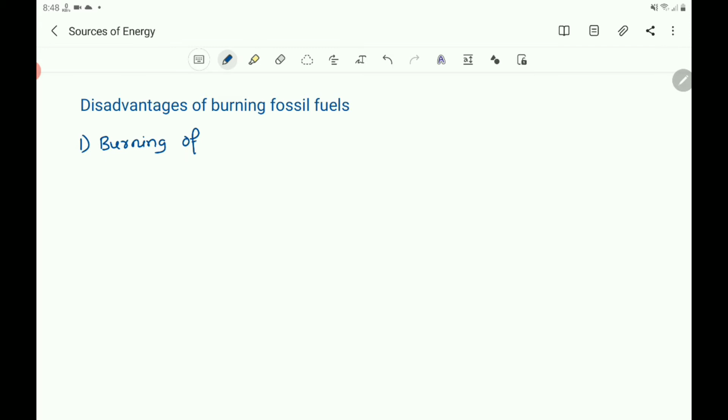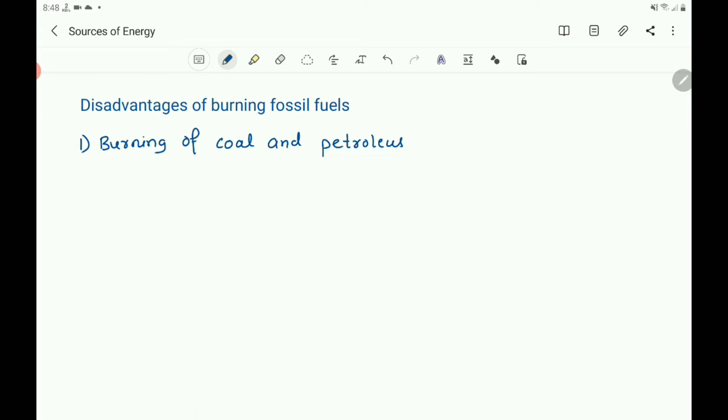Burning of coal and petroleum leads to air pollution.

Burning of fossil fuels causes acid rain by forming acidic oxides of carbon, nitrogen and sulfur.

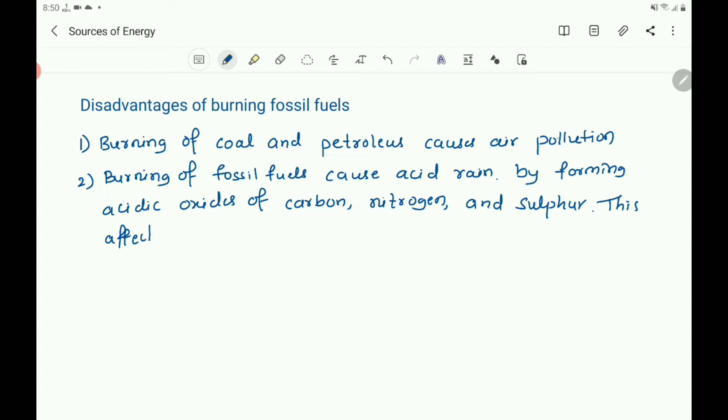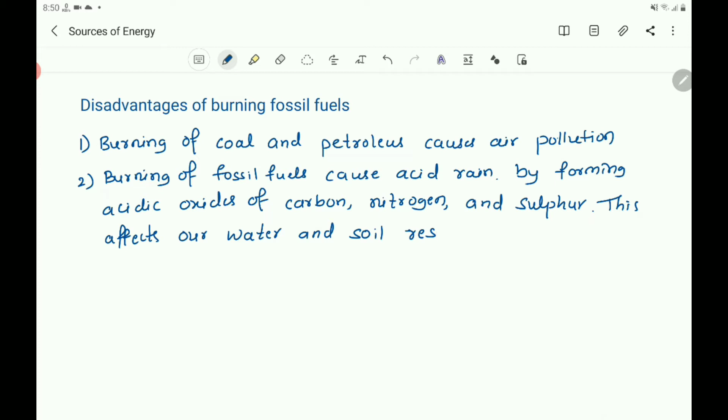This affects our water and soil resources.

Burning of fossil fuels causes greenhouse effect also, and this greenhouse effect causes global warming. It increases the global temperature.

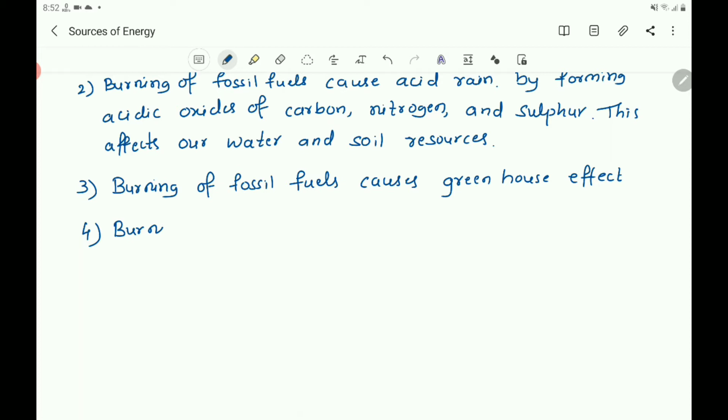And also, burning of fossil fuels causes smog, which causes breathing problems and other hazards.

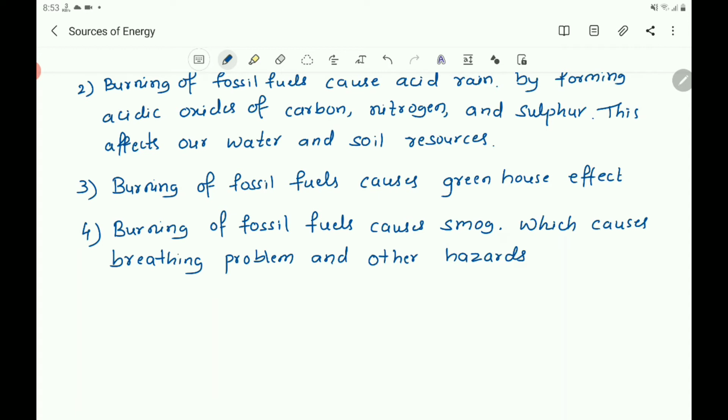These are some of the disadvantages of burning fossil fuels.

Wood should be replaced by alternate sources of energy. Why? The use of wood as a fuel is not advised, although forests can be replenished. Continuous use of wood causes deforestation. Yes, we can replenish the forest, but it is advised to minimize the use of wood, because it takes more than 15 years for a tree to mature. Cutting off wood would also cause environmental imbalance.

Further, burning of wood causes a lot of pollution. For these reasons, it is not advised to use wood as a fuel. So, wood should be replaced by alternate sources of energy.

It takes more than 15 years for a tree to mature.

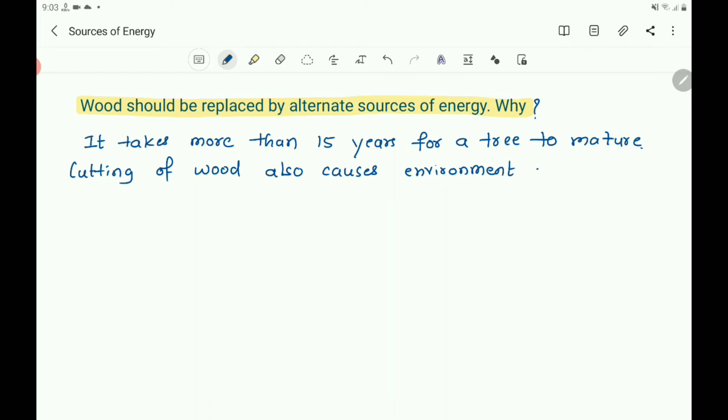Cutting of wood also causes environmental imbalance.

Further, burning of wood causes a lot of pollution. For these reasons, it is not advised to use wood as a fuel.

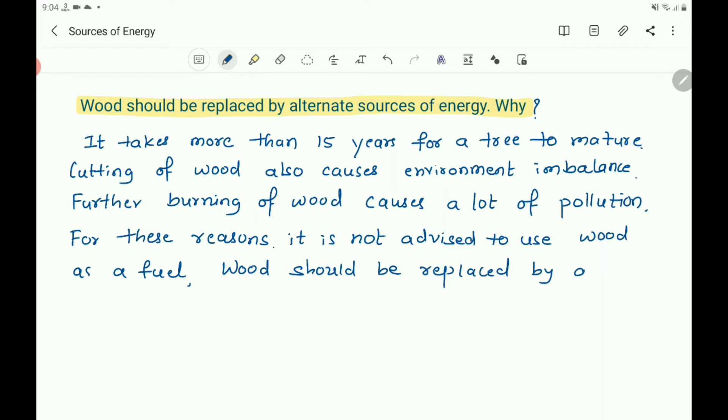Wood as a fuel should be replaced by alternate sources of energy.

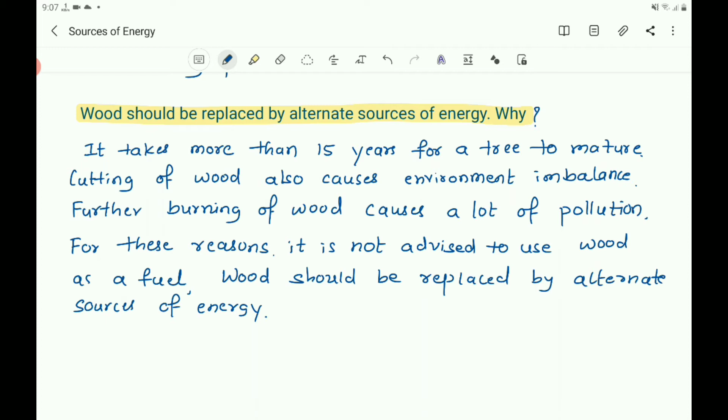The pollution caused by burning fossil fuels can be somewhat reduced by increasing the efficiency of the combustion process and using various techniques to reduce the escape of harmful gases and ashes into the surroundings. Besides being used directly for various purposes in gas stoves and vehicles, we can use fossil fuels for the generation of electricity.

Children, you do one activity to produce electricity in small quantity. Take a table tennis ball and make 3 slits into it. Put semicircular fins cut out of a metal sheet into these 3 slits.

Pivot the tennis ball on an axle through its center with a straight metal wire fixed to a rigid support. Ensure that the tennis ball rotates freely about the axle, so it acts as a turbine, fitted with metal sheets.

Now connect a cycle dynamo to this, and connect a bulb in series.

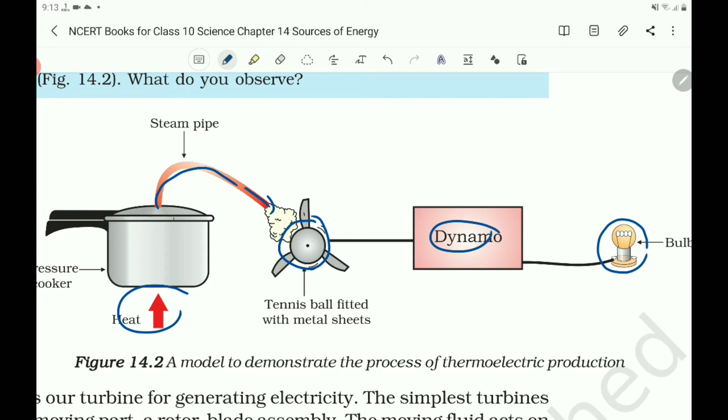Direct a jet of water or steam produced by a pressure cooker at the fins here. By using the pressure cooker, steam is produced, and that steam is allowed to fall on this tennis ball which is fitted with metal sheets. Then what happens? This tennis ball rotates.

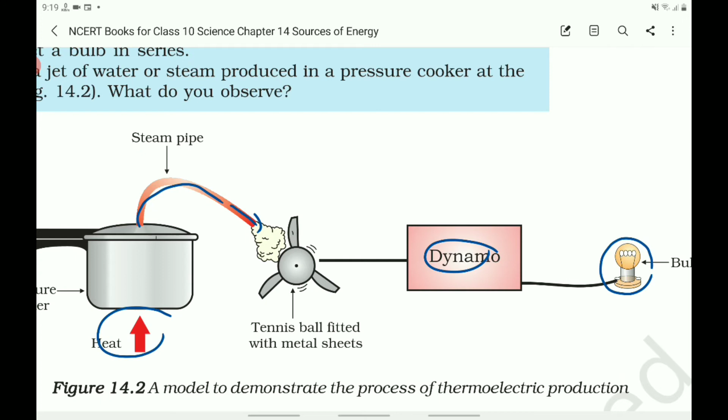This is our turbine for generating electricity. The simplest turbines have one moving part, a rotor blade assembly. The moving fluid acts on the blades to spin them and impart energy to the rotor. Thus we see that basically we need to move the fan, the rotor blade, with speed which would turn the shaft of the dynamo and convert the mechanical energy into electrical energy.

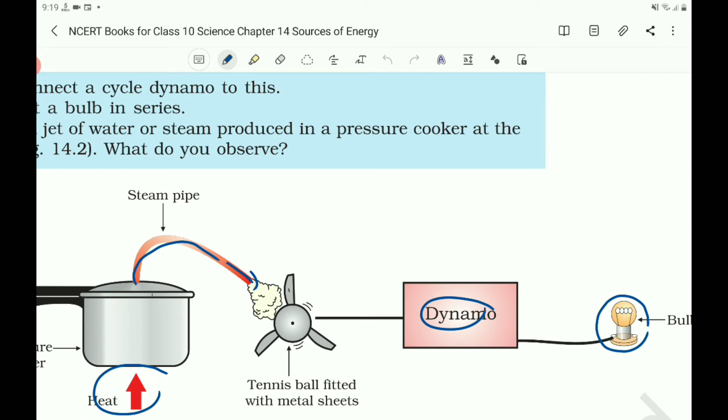The form of energy has become a necessity in today's scenario. The various ways in which this can be done depend upon the availability of resources. There are different types of generating stations. Here, to rotate the turbine, we use the availability of resources. You can use moving water, or steam generated by burning coal, or steam generated by using diesel.

Various sources of energy can be harnessed to run the turbine and generate electricity in various ways. Thermal power plant is there, hydro power plant is there, wind energy mills are there. Depending upon the availability of sources, we can generate electricity using the generating stations. In all the generating stations, the principle is same: you have to move the turbine, according to Faraday's law. We have to change the magnetic field linking with the coil and electric current will be induced in the coil.

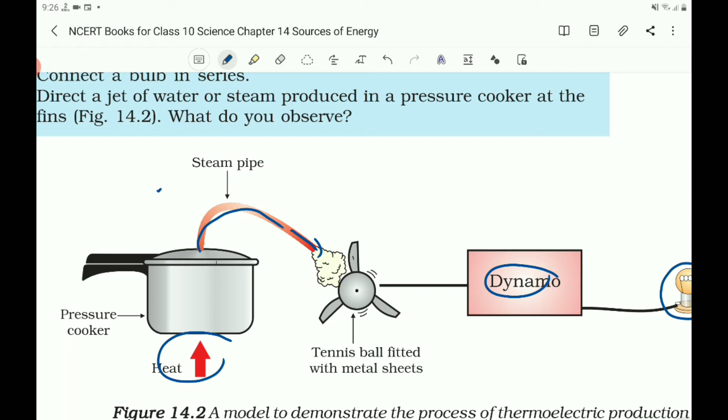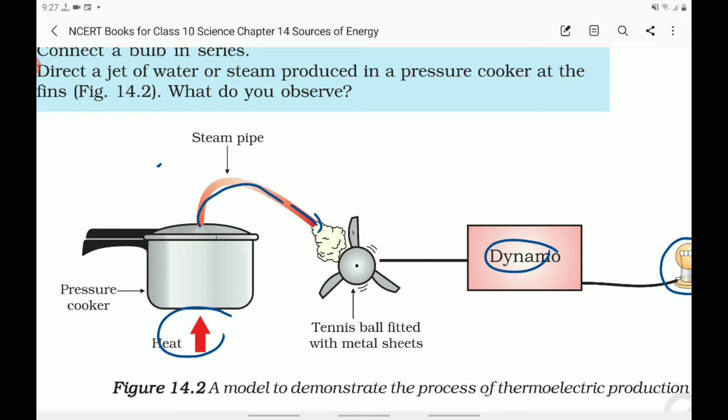To change the magnetic field, the armature may be rotated or magnets may be rotated. To rotate them, we have to use some available sources of energy. Depending on the availability of the sources of energy, they are termed as thermal power plant, hydro power plant, atomic energy plant, wind energy mill, etc. So there are different types of power plants to generate electricity, depending upon the availability of resources to rotate the turbines.

One of them is thermal power plant. Second one is hydro power plant. Next one, nuclear power plant. Many are there: geothermal power plant and windmill. All these are also different types of power plant. So you write etc.

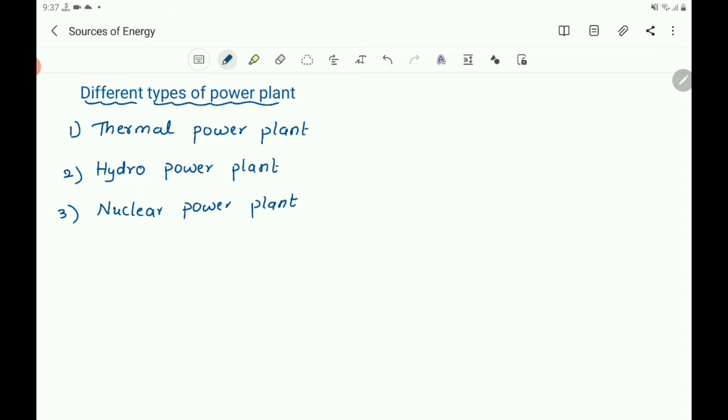Let us take the thermal power plant. Here fossil fuels are used to produce the steam. That steam is used to rotate the turbine. Large amounts of fossil fuels are burnt every day in power stations to heat up water to produce steam.

This steam runs the turbine to generate electricity. The transmission of electricity is more efficient than transporting coal or petroleum over the same distance. So it is better to generate electricity by using fossil fuels. Therefore, many thermal power plants are set up near coal or oil fields. The term thermal power plant is used since fuel is burnt to produce heat, which is called heat energy or thermal energy, and that energy is converted into electrical energy here.

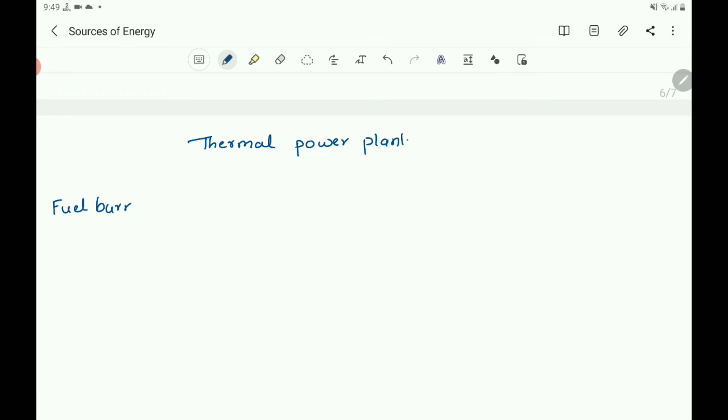So you write that fuel burnt, next steam. Steam is rotating the turbine. Next, here electricity will be generated.

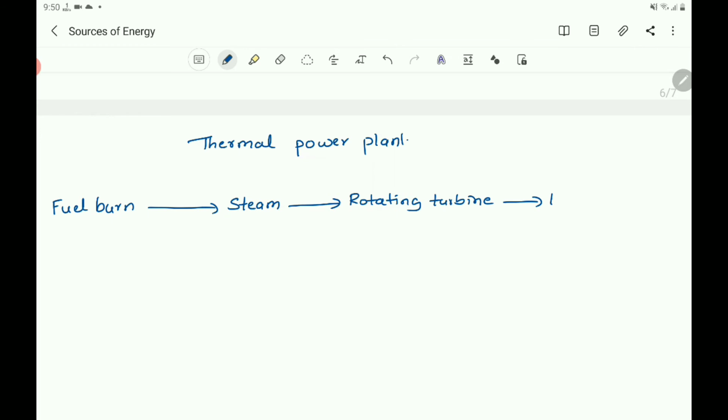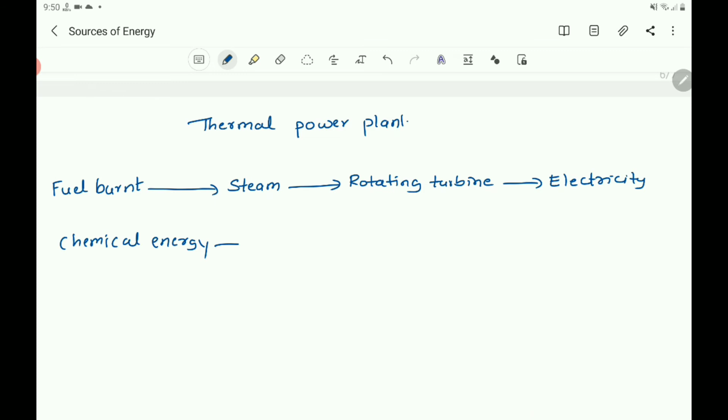Here fuel is having chemical energy. Chemical energy is converted into steam, that is heat energy. Heat is converted into mechanical energy. Mechanical energy, next it is electricity.

Here in thermal power plant, heat is generated, so it is thermal power plant. The heat produced is converted into steam, and that steam rotates the turbine, and you know that according to Faraday's law electricity will be produced.

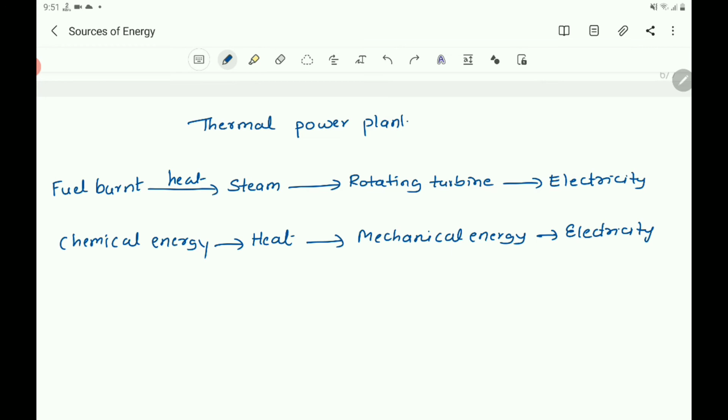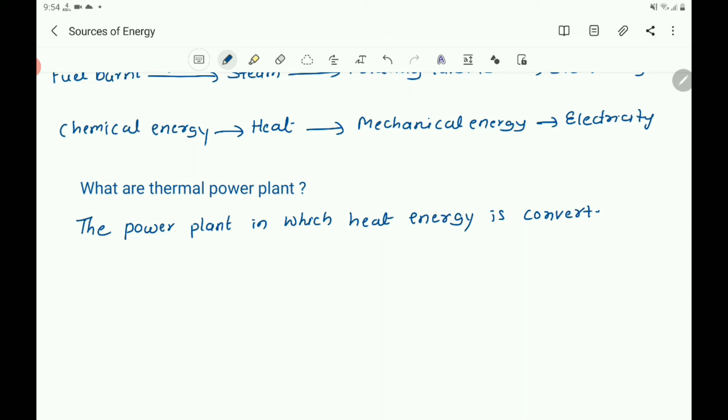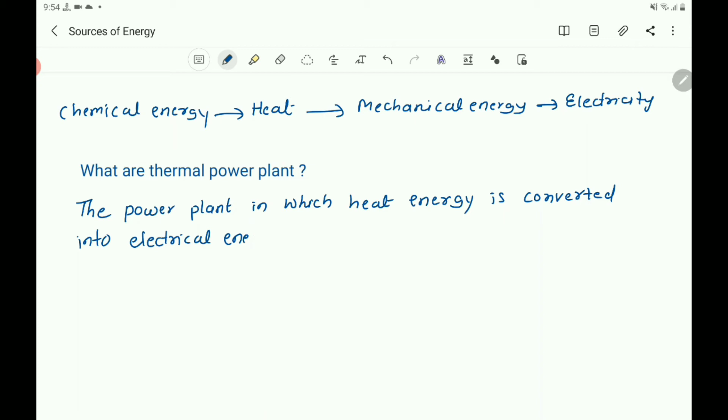Then you write what is thermal power plant. So the thermal power plant is the power plant in which energy is converted into which energy? Chemical energy or heat energy, you can write: in which heat energy is converted into electrical energy, is called thermal power plant.

So in thermal power plants, fuel is burned to heat up water to produce steam, which is designed to run the turbine to generate electricity. So write that in thermal power plants, fuels are burnt to heat up water to produce steam, which is designed to run the turbines to generate electricity.

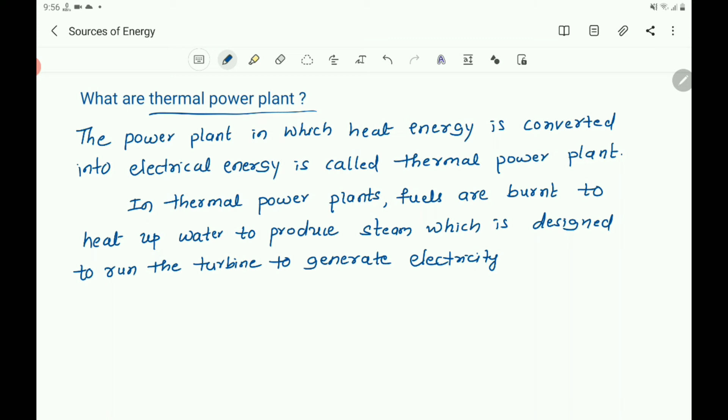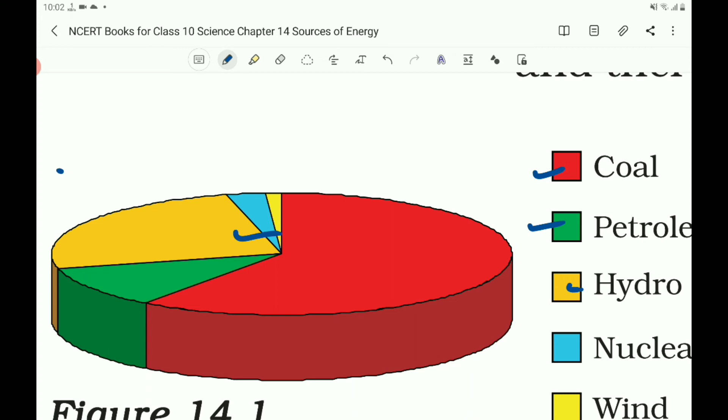A quarter of our energy requirement in India is met by hydro power plants. In order to produce hydel electricity, high-rise dams are constructed on the river to obstruct the flow of water, thereby collecting water in a larger reservoir. See the water reservoir in which the water is collected by obstructing the flow of water.

The water level rises, and in this process the kinetic energy of flowing water gets transformed into potential energy. When the water is collected in the dam, because of its position it has potential energy. The water from the high level in the dam is carried through pipes to the turbine, which is at the bottom of the dam, and water is made to flow through the pipe and fall on the turbine.

Since the water in the reservoir would be refilled each time it rains, hydropower is a renewable source of energy, and we would not have to worry about hydroelectricity sources getting used up, while fossil fuels would be finished one day. Every time the reservoir can be filled during the rainy season, you can continuously run the hydroelectric generating station. But construction of big dams has certain problems.

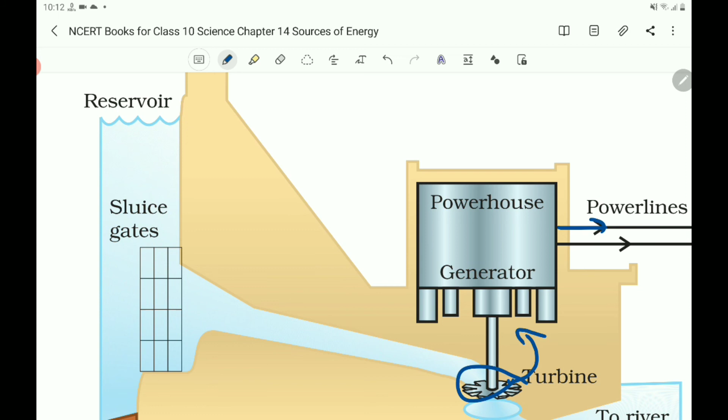And according to Faraday's law, again there is production of electricity.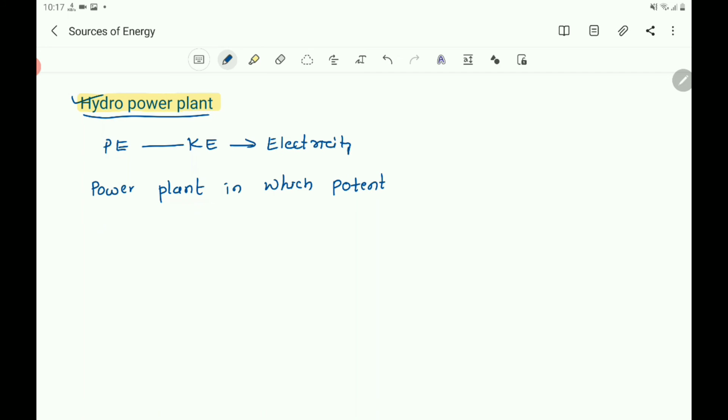So you write: What is a hydro power plant? It is a power plant in which potential energy of water is converted into kinetic energy, which is then converted into electrical energy. This is called a hydro power plant.

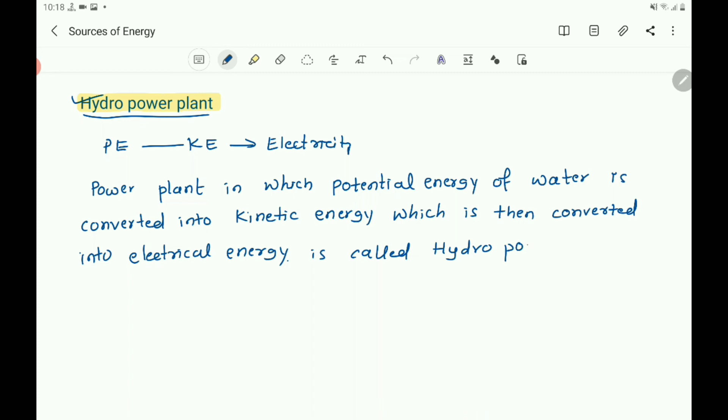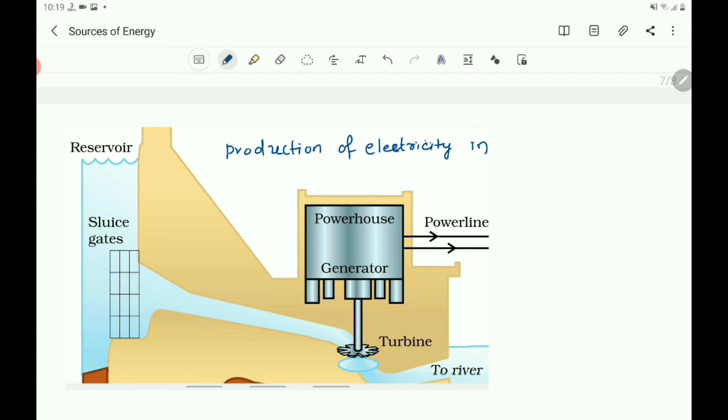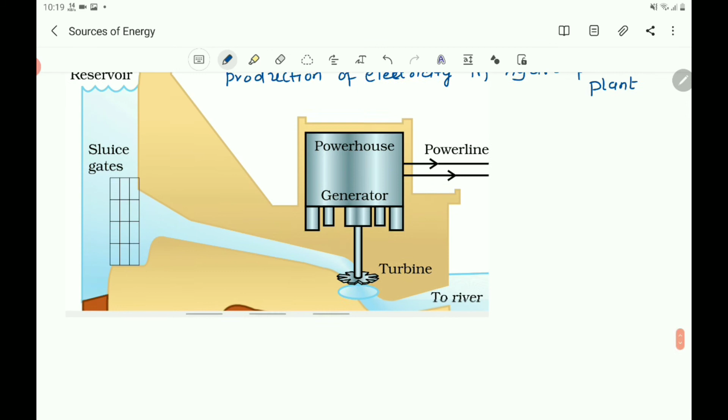And in a hydro power plant, how is the electricity generated? Production of electricity in a hydro power plant - so you write that. What is the procedure here? Water is collected at a height.

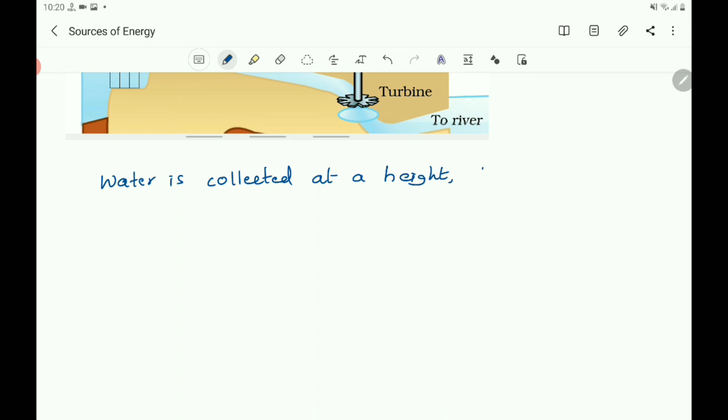Water is collected at a height. When it is allowed to fall to a lower level, the potential energy of water is converted into kinetic energy.

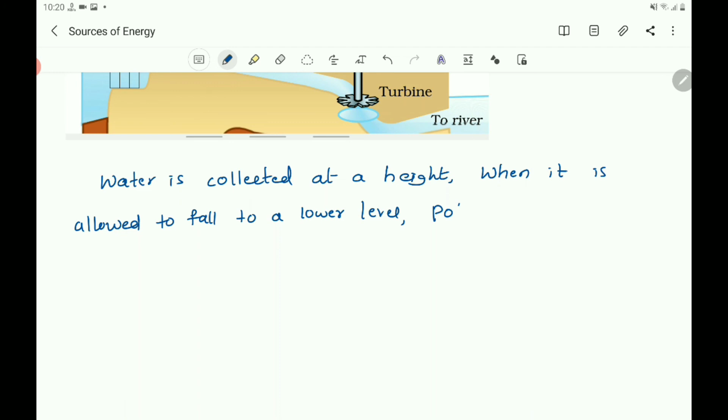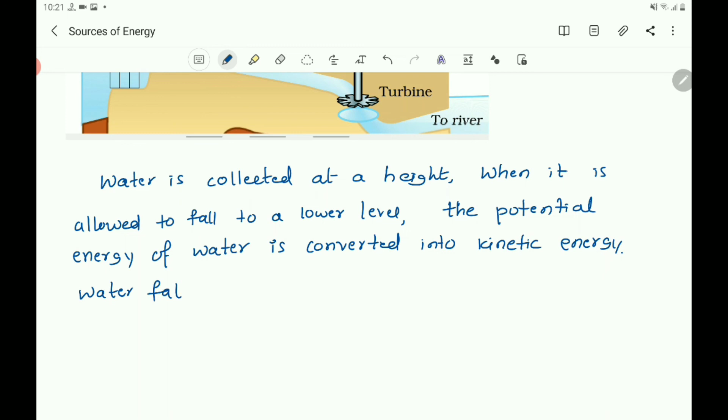The potential energy of water is converted into kinetic energy. Water falling at high speed revolves the blades of a turbine.

The turbine is coupled to a heavy wheel. The heavy wheel in turn rotates the wheel of the generator, or generator wheel.

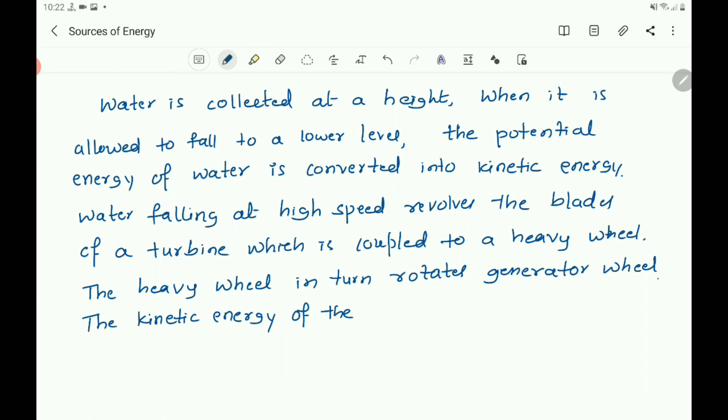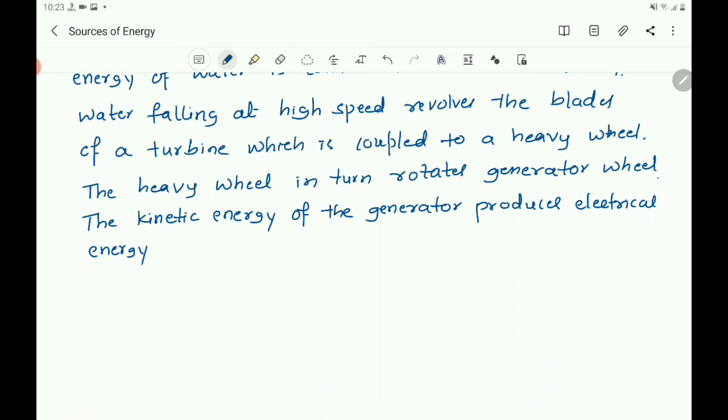The kinetic energy of the generator produces electrical energy. This is called hydroelectric power. That is the method of producing electricity in the hydro power plant.